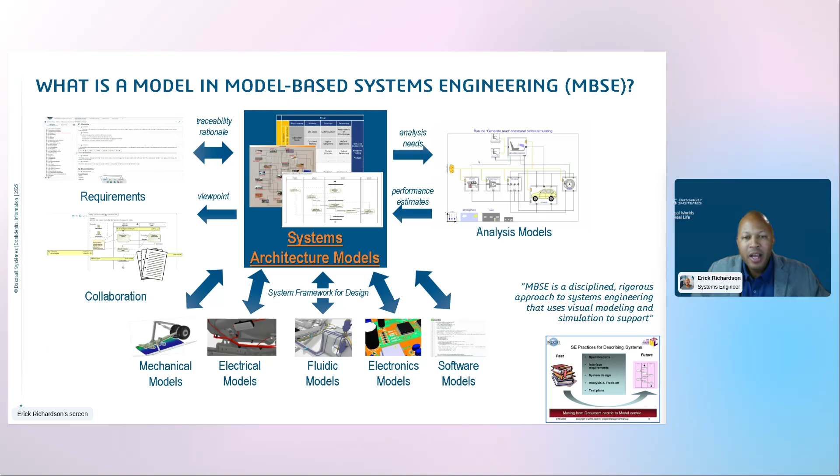So now that we've covered model-based systems engineering, MBSE, let's talk about complexity for software defined vehicle development. So here I'm taking you to our 3D experience platform. At Dassault Systèmes, we have this 3D experience platform where you can do a vast amount of different things with our different brands. But for software-defined vehicles, Sam touched on a lot of how the market is going. In the market development, we're expecting things like the compute platform. So, enabling high-performance compute. These data centers everywhere. And there's so much growth that we expect to happen by 2030, going from 40 to 240 billion in that market.

Things like the software platform. So creating these containerized or modular software components that you can reuse and access in different ways. That's growing from 30 to 190 billion dollars. And then other data applications, all of these things are growing. So the market is here. We may have called it something before, software defined vehicle, and we'll continue to evolve the different names. But at its core, there's a lot of work being done and a lot of market that's growing, and we want to be able to manage that complexity.

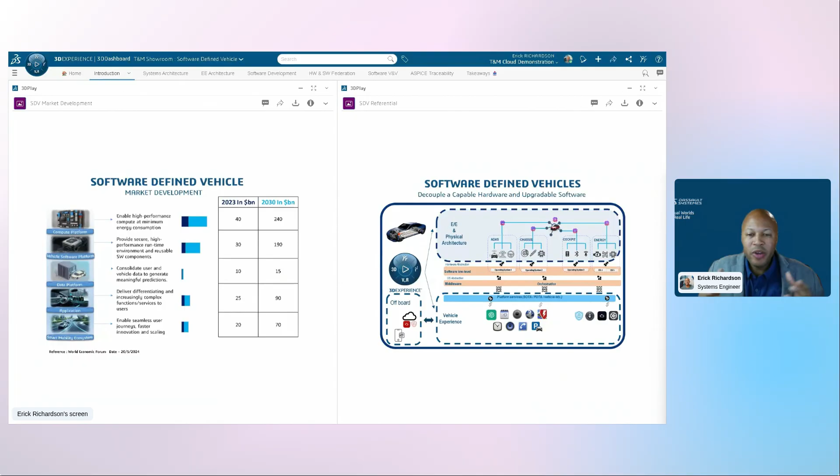So with that EE architecture, we're establishing that in the systems architecture phase, and then passing down that design intent to enable those vehicle experiences, both on board and off board, all kinds of experiences for your customers. Bringing in AI chatbots, OnStar, all this kind of stuff. We want to be able to do that at another level, and you have to understand that architecture before you go and implement it, right? So with that, let's talk a little bit about the digital continuity of our workflow. We touched on the systems architecture level, going down to the design domains. So we start with systems, we go to EE, and then we go to software.

So what is EE? EE architecture means electrical electronics architecture. I'm a double E. My degree is in electrical engineering, but this EE we're talking about is electrical electronics architecture. And managing the increasing complexity of products, we break it down into three different pockets. First, understanding what kind of equipment you need. That's our hardware point of view. Then we'll understand which equipment does what. So now we're talking the software point of view.

And then what information are we exchanging? So, what kind of communication protocols are we using? What buses are we moving information on? What's sent in a packet? All that kind of stuff we need to understand before we just say, okay, that's going to be somewhere down the line in implementation, because we want that to hit our requirements of time, of the speed that information needs to get from different parts of the vehicle to the customer. So we break it down into those three pockets. And then, EE architecture really continues that digital thread for model-based systems engineering, from systems all the way down to model-based design.

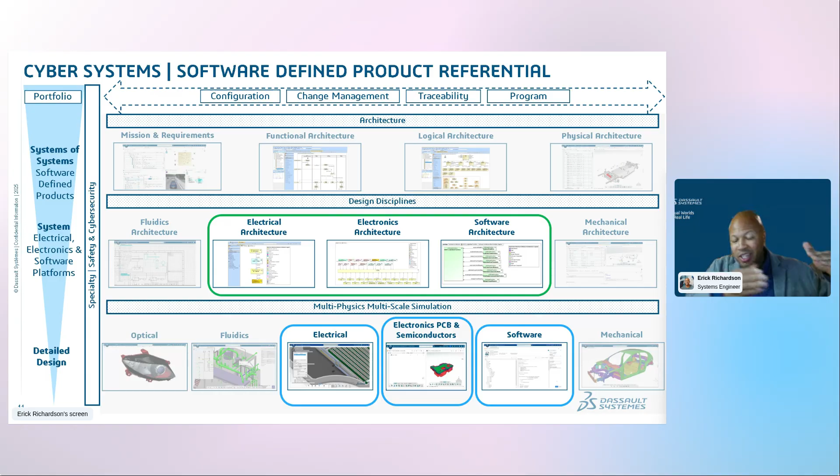So at systems level, we have that functional and logical architecture that we've done for our systems architecture. Then we're going that first step into the physical architecture, and we're splitting off these three design disciplines: electrical, electronics, and software. So then those designers can go on, and I'll show a little bit how the software continues to be developed. But the electrical, the electronics also continues to be developed, and systems engineers, we kind of bring it all together.

So now going back to here, let me show you how with systems engineering, we're always thinking, okay, how are we hitting our requirements? We understand our stakeholder needs, but now here we're talking about an ADAS system. So under that ADAS system, we have things like an ALCA system, active lane change assist, lane keep assist, the LKA, all these different requirements we want to hit.

And this is from our systems architecture tool, CATIA Magic / Cameo. And this is a functional architecture in an activity diagram. So in our dashboard on the 3D Experience platform, we're able to see all of this work that's done by the systems engineers and all of the engineering teams.

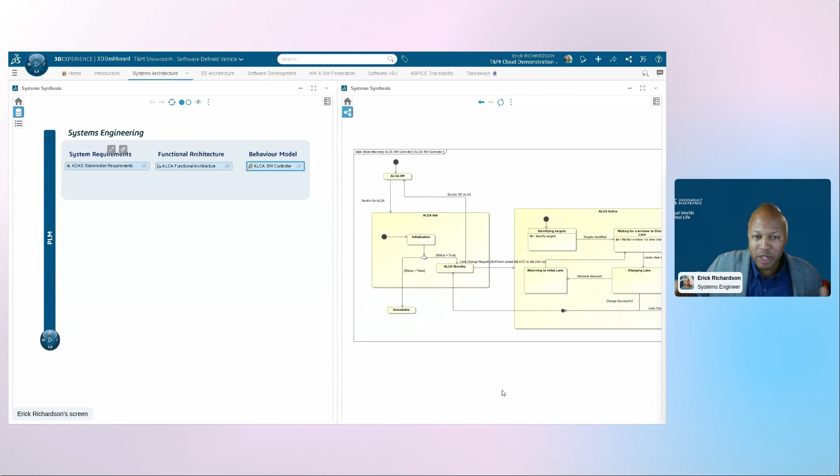Here is a state machine diagram where we're understanding, for the active lane change assist software controller, all of the different states that it can be in and how we want to design it for implementation. So we pass this design intent on down. Now at the next level, EE architecture level, we're talking the ALCA hardware. So we've abstracted down to the ALCA hardware that feeds up to the ADAS system.

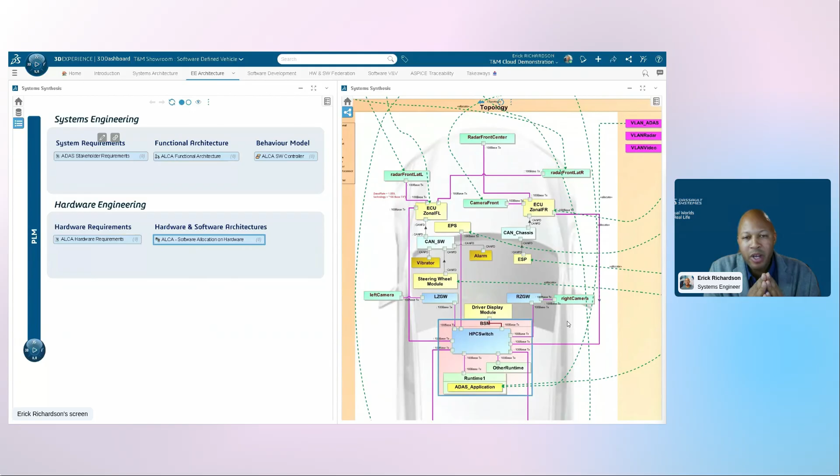And here, when we talk EE architecture, we're able to map, if we understand our topology, our hardware architecture, which ECUs, and Sam hit on this, there could be hundreds of ECUs in these vehicles. Also in aerospace, we call these LRUs, line replaceable units, avionics units, things of that sort. Same concept, different fields call them different things, but same concept.

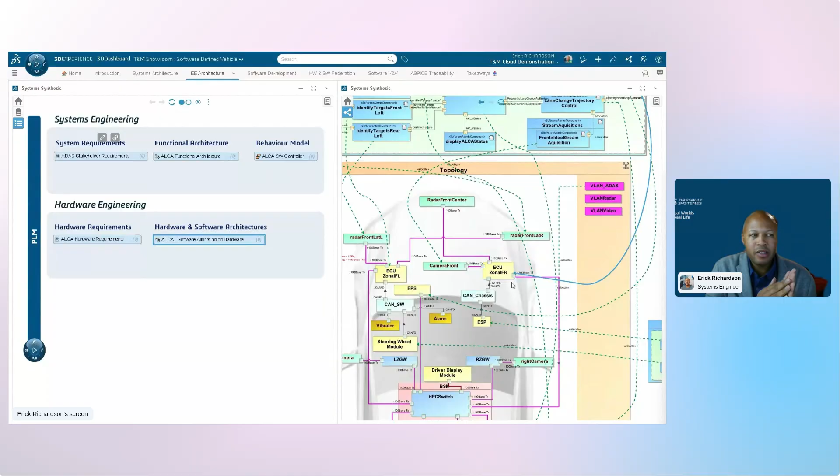Here's software compositions. We're breaking down atomic components, software to its smallest component, so then we can reuse that over time. So we're making software that's reusable, that we can manage, and always have access to. And we allocate that software to hardware, or we allocate functions to hardware. We can do that with our EE plugin in our CATIA Magic system.

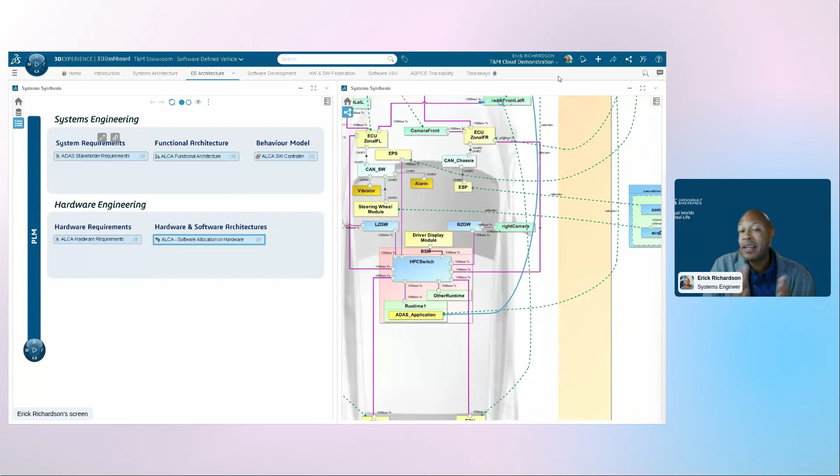So understanding which part of our vehicle, which ECUs, which sensors, which actuators, and even the communication matrices that we're going to use for that communication protocol. We can define that in the systems architecture. So now we're talking software. So we stepped into those three domains. We're in the software domain. So we want to hit those software requirements.

Software engineers want to use the tools they're familiar with. So they're going to see these different bugs, these different tasks, and they're going to keep those in those ALM tools. But here we have this source of truth at the 3D Experience platform where we can see into all that and keep everybody knowing what's going on in the grand scheme of things. So enabling multidisciplinary collaboration. Like I said, with those ALM tools, we have that openness. People can use the right tool for the job, and that's what we want to happen.

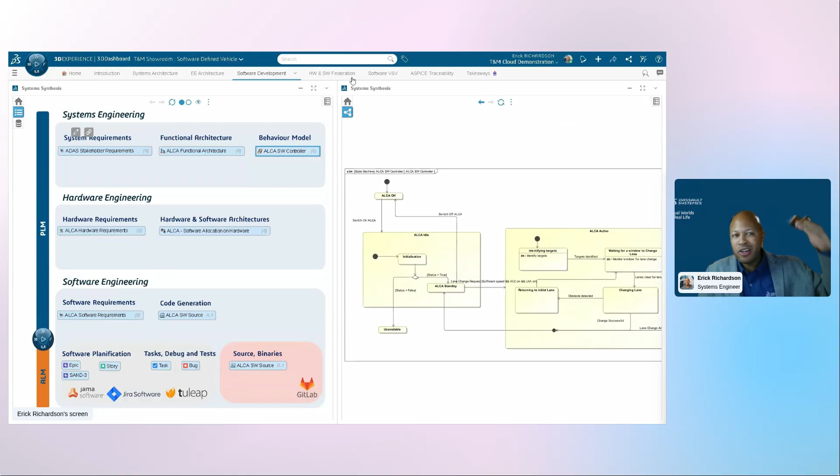So here, I'm going to show a little bit how we start that first step of coding from our state machine. Our systems engineer, we thought through, okay, how is this going to work in the real world? How are these states going to change? So we can start that first code generation, first level, and then it can continue to get developed in those specific tools.

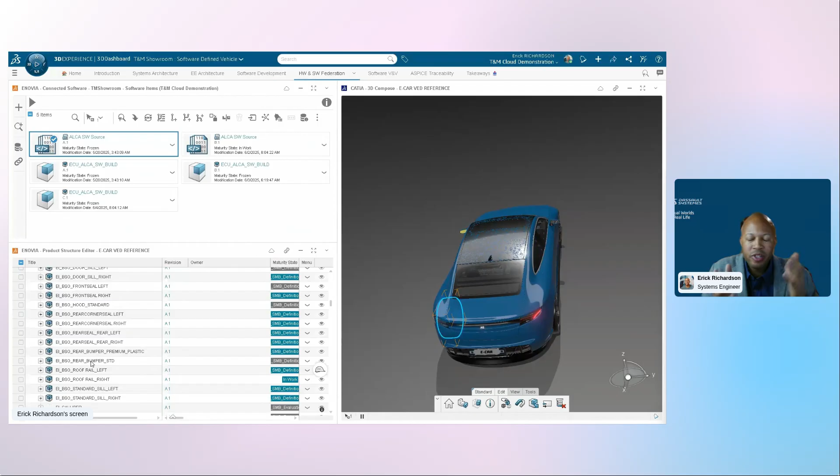Here in the platform, we see our CAD, we see our BOM, we have access to understand all of these pieces of our vehicle as we're developing this software-defined vehicle. We understand our role in the grand scheme of things.

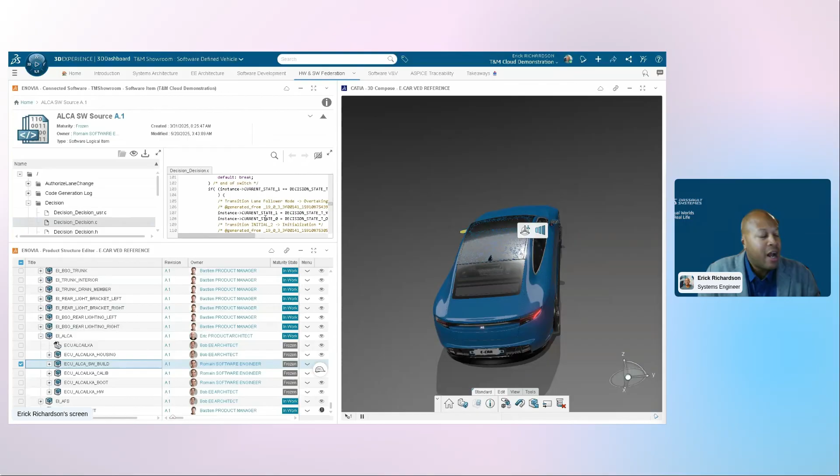So here, this BOM item of an ALCA, active lane change assist, we have a software build associated with it. So that software, it's actually hosted in a GitLab repository. So we can go in and see that C code, this decision C code, right? That's hosted elsewhere in GitLab, but this is our source of truth where we can see, and when it's updated, we can understand which version is allocated to our ALCA system for whichever type of vehicle we're doing, platform-wise or vehicle-wise.

So then once we get that software, we want to validate it. We want to validate it in the real world, but we can also validate it in the virtual world. So we create these virtual experiences, these virtual environments where we can put the code that we are developing into different test cases. So we've created these test cases. We're always thinking about requirements, so we want to understand how we're testing our requirements here.

So with our validation plan, we're going in and we're seeing these ALCA test specs, and we're putting the requirements to the test cases. So we can have an allocation matrix here where we can then look at our traceability and say, okay, we tested this and these are the results. And now we've passed this test, so we've passed this requirement.

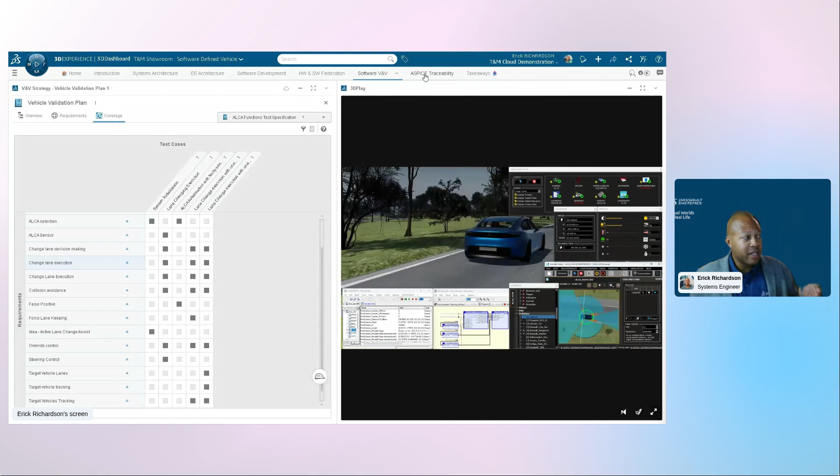So now let's talk a little bit about traceability. Once we do those tests, a lot of times we use different frameworks. Depending on your customer, you may have to deliver in a certain framework. In automotive, ASPICE is one of the leading frameworks. So we can match whichever framework you need, but here you put in your scope for traceability, and using this ASPICE framework, we can see how it's related to the Jira data, the tasks, the software code, tracing all the way back to these stakeholder needs, because that's what we're looking to satisfy.

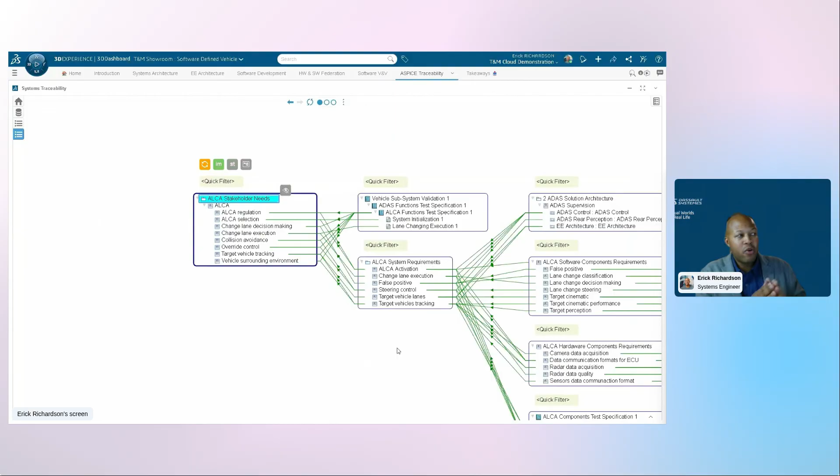So here we're going to an impact analysis, and we can see the entire digital thread. All the way from the high-level stakeholder needs that we've established to the system requirements that we've created, all the way to the tests that we are implementing to test these requirements, to our hardware topology, the sensors that we need, what it affects, some bugs that are out there.

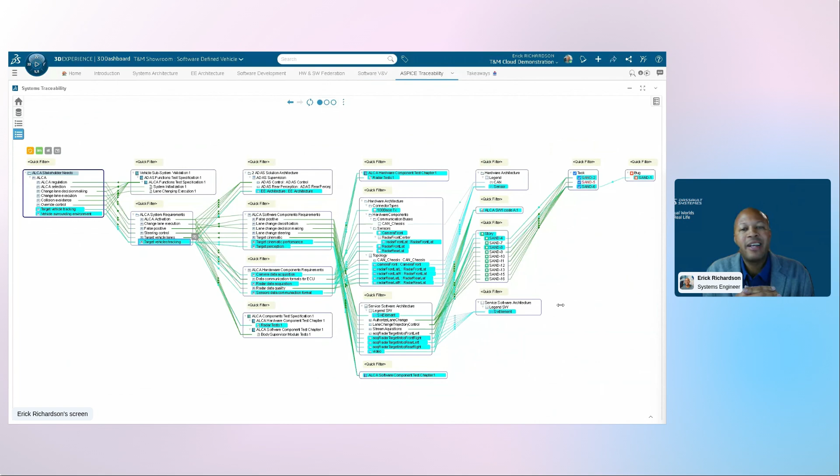For instance, this target vehicle tracking in the system requirements goes all the way to the tasks, SAND-2 and 6. So there's a traceability where we can understand if something changes, then we need to look into all of these things that are touching it, and then make sure that the impacts are not going to take us out of satisfying the requirements.

So looking at it from a systems engineering perspective, I'll talk a little bit about the takeaways. This systems engineering perspective allows us to have that single source of truth where we can see the work being done by all of the different engineers, the project managers, everybody that's involved in the development process, making sure that we're hitting the customer needs. All stakeholders are represented. We have that single source of truth where we can establish a dashboard and see the information that you want to see.

We have that end-to-end traceability where we can go with that ASPICE process or other frameworks that we use so that you can have that certification. Digital continuity throughout. And we do this for a bunch of customers. Renault in France is one of them, but there's a bunch of customers that are using these tools and these ideas. So that is my presentation.